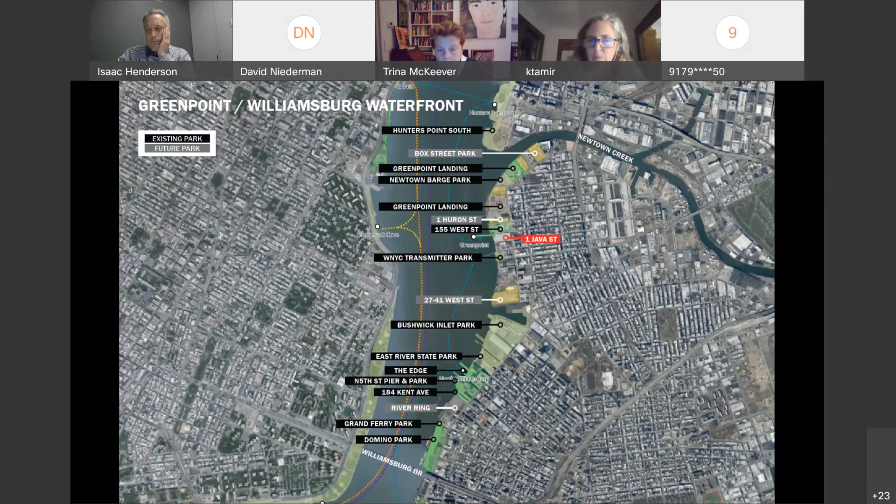Some of you have seen this slide before. We think it's really important to show ourselves in the context of the Greenpoint, Williamsburg waterfront. The greater waterfront is slowly being developed, and the waterfront parks are becoming continuous. For us, the first important thing is to be continuous with the community and the neighborhood, but also to the north of us, to the south of us, and of course the ferry to the water. The site sits between India Street, Java Street, West Street, and the water. We have India Street Pier as part of the project, as well as an upland area of about 11,520 square feet.

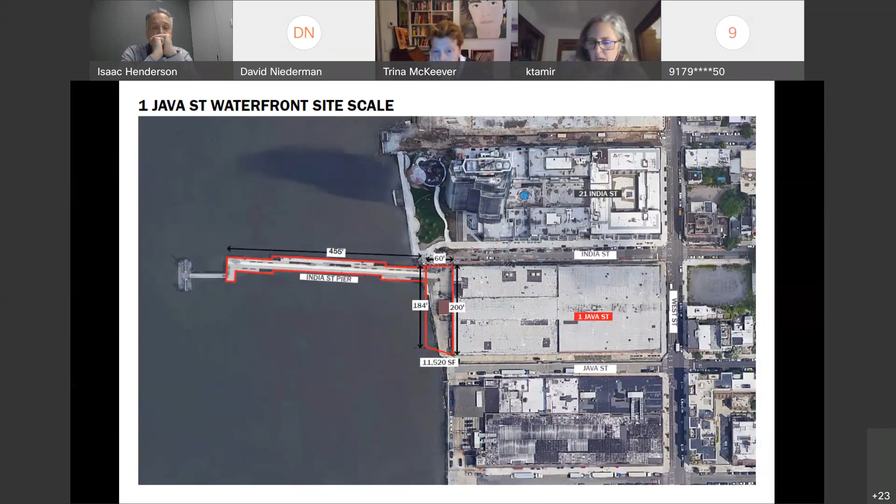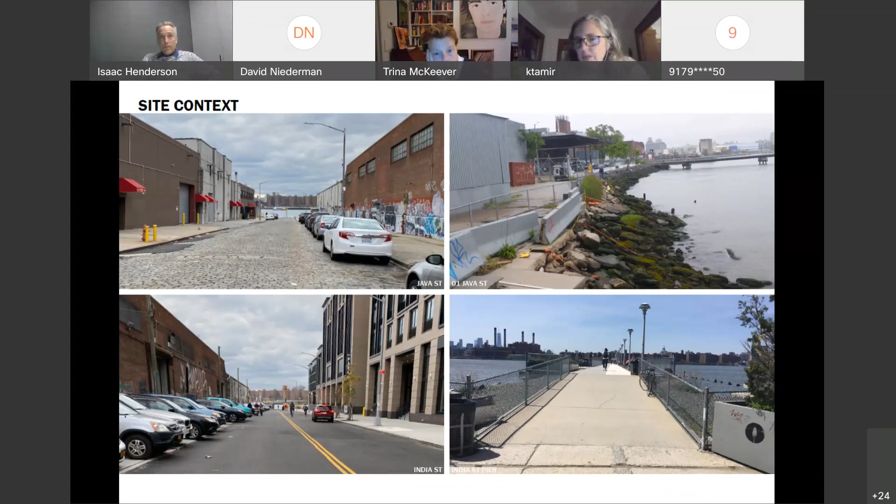The site context, you might know it. On the left side, we have Java Street, a cobblestone street that dead-ends into the water. Our neighbor to the south is a low-lying building, not changing at the moment. Below that is India Street, with the new neighbor 21 India to the right and the site to the left. On the upper right is the waterfront as it is today, in need of cleanup and refurbishing, and below that is the pier, the access to India Street Pier today.

Some of the site's constraints: the site condition is windy and salty, the water's edge is broken and needs repair, and the existing street elevations are quite low. The scale of the site, the WPA area, is also a constraint. The East River has strong currents, choppy water, and ferry wakes, so how far we can build into the water was something we looked at early on. The flood elevation and projected sea level rise are always a constraint at the waterfront edge, and of course city planning zoning requirements are another.

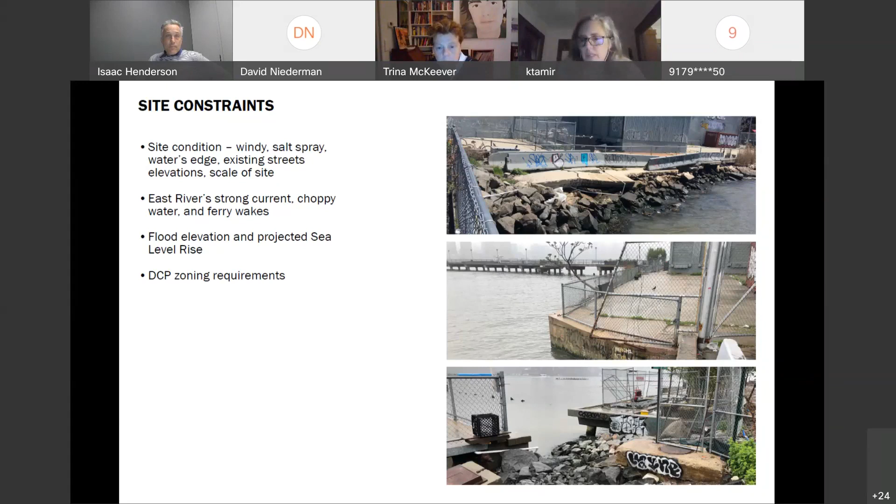The waterfront public access area is shown in green here, and it includes the pier, as I've mentioned. In addition, Lend-Lease is providing the area in yellow, which is almost double that upland area.

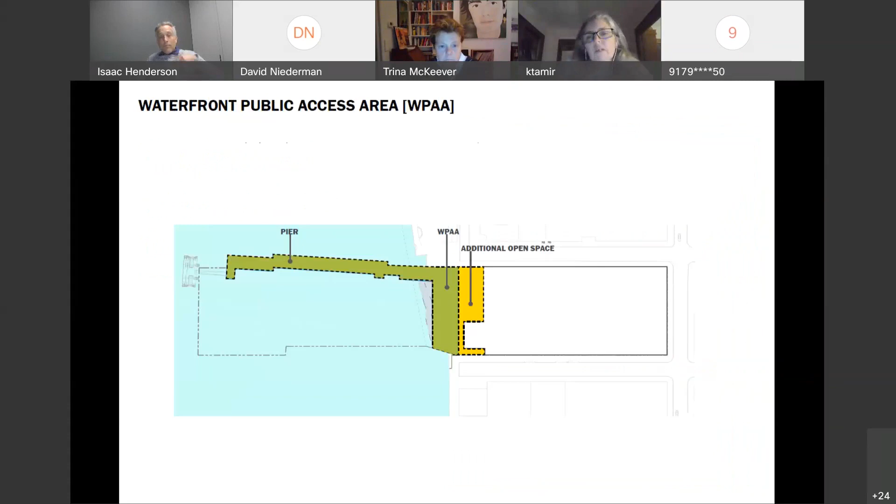The design is inspired by Greenpoint shipbuilding, the history of shipbuilding. The slip to us connotes a kind of freedom—for people, for boats, just to watch the coming and going. There's something really freeing about that. So in the design, you see these diagonal lines; they're not only pathways, they're a nod to that history, to the slips and what they could do.

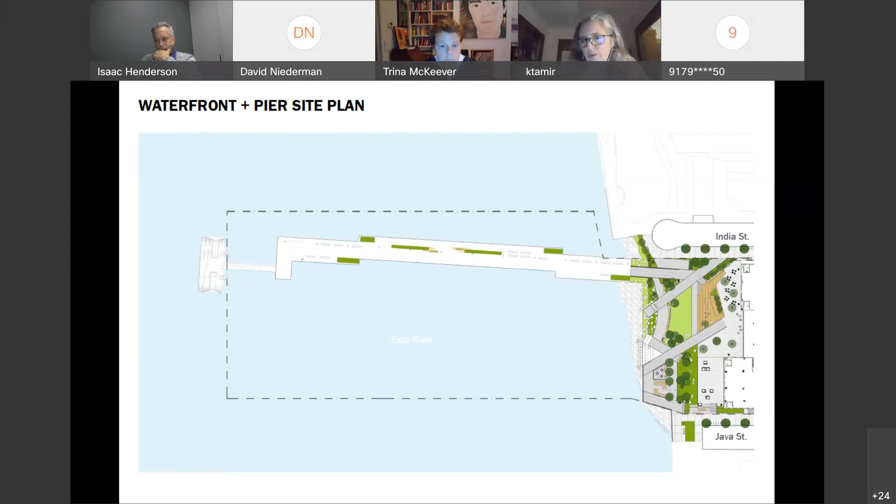This site plan shows the pier, but we'll focus really on the upland—we're not doing a lot on the pier. The waterfront site plan shows the area bounded in orange, which is the WPA area. We have the India Street Pier. I'm going to go from left bottom to right, sort of counterclockwise.

We have a number of gardens—upland gardens, riparian gardens—that also incorporate a sort of living shoreline, if you will. We have the river landing, one of the terminuses of the slips; this angle here is sort of immersed in planting.

The next one down, one walks down—there's of course benches, more gardens. The next slip down is what we call the prow, another sitting-steps area coming down that hugs the get-down to the south of it. The get-down is a series of steps that get to the water.

South of that is a platform area—we have what we call the pier reveal, a cutout in the platform fitted with tidal pools and a counter-height table with sitting stools around it. To the south of it, we have a social alcove with double-sided benches that offer engagement and gathering.

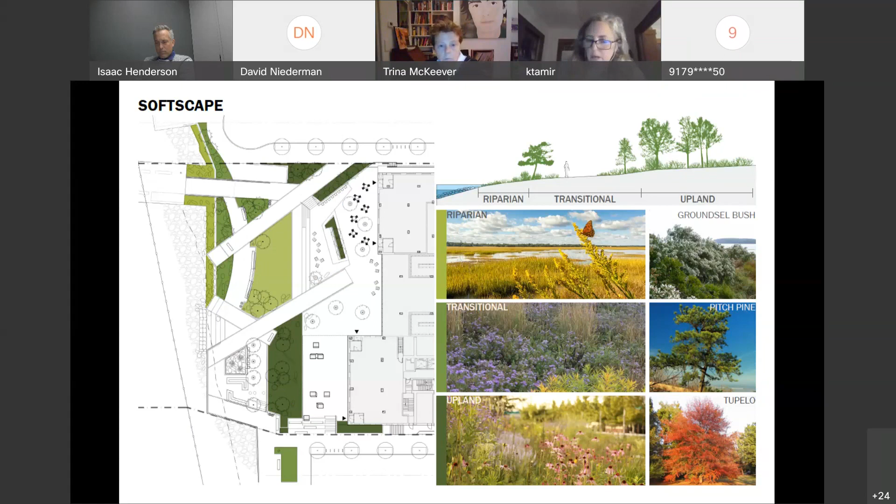A little more about the planting: at the water's edge we have Spartina patens that can take salt water, along with solidago, bearberries, and similar species. They'll be planted within the riprap at the very edge, along the bulkhead, which sits waterward of that. The next layer, the transitional planting, will include aster.

For tree species, we'll have Pinus rigida, the pitch pine, as well as the shorter pine used in Domino and Grand Ferry Park, and sweet gum, along with grasses and shrubs like baccharis that lend a kind of wildness to the planting beds.

A little bit upland, we will have ornamental trees: amelanchier, Nyssa, and Betula. On the prow we'll also have one specimen magnolia tree, along with various shade-loving and sun-loving plantings depending on location, for seasonal interest.

Connection to the river: again, the pier—we want to encourage people to come and fish and use the pier as much as possible. The river landing is a recessed landing within the planting in the riparian garden, so it really feels as if you're closer to the water.

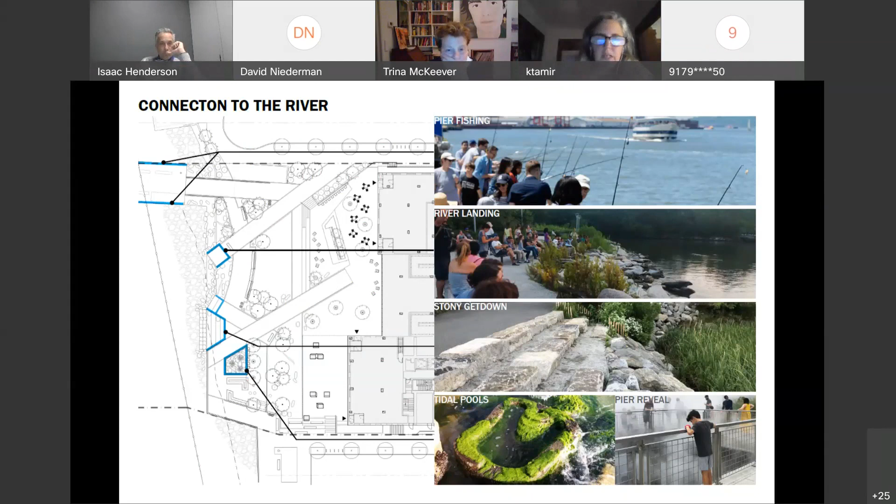The same with the stony get-down, a more natural-looking get-down. And then we have the pier reveal with the tidal pools at the bottom, where one could see the life of a tidal pool over the course of a day, a week, a season, a year, which would be interesting.

Some sustainability aspects incorporated here relate to stormwater management and natural resources. We've added 6,500 square feet of permeable surfaces using engineered soil for quick drainage, and incorporated a living shoreline technique at the water's edge. We're adding 36 trees, reducing the heat island effect through both soft surfaces and trees, sequestering carbon and providing shade. All of this also increases habitat area with native plants, attracting pollinators, and the tidal pools will be another element of that.

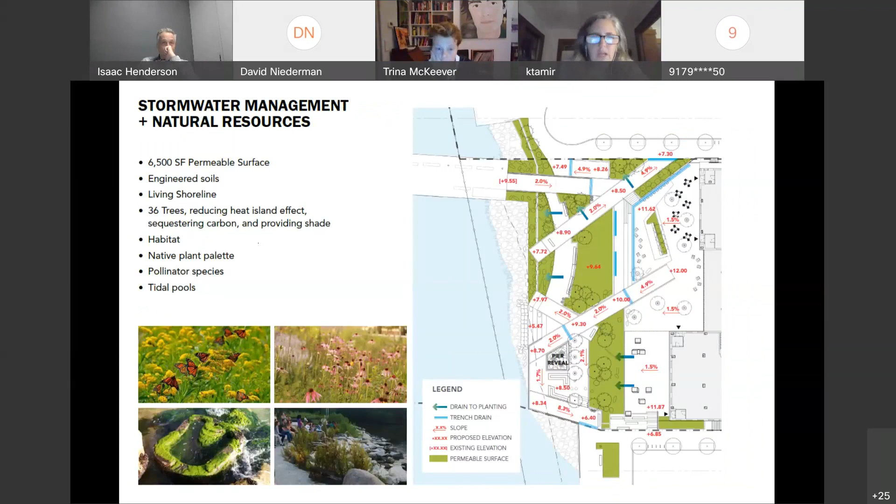So walking around the site, this is the approach from India Street. Coming up to our left would be the perch, the area that takes you upward to that kind of wooden deck. To the right would be the pier, and to the front is the water.

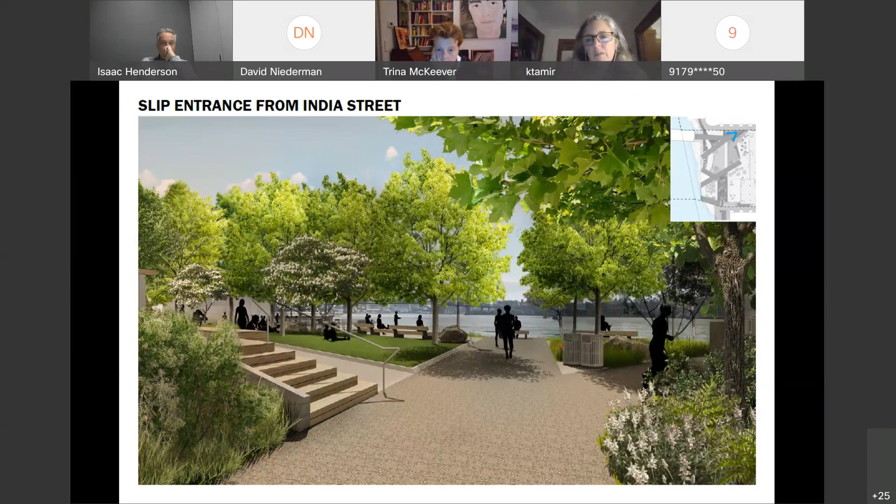If you look to the right, you see the approach to the pier. The ramp that leads one to the pier will be newly created, with a curb and railing, in the same fashion as the rest of the waterfront.

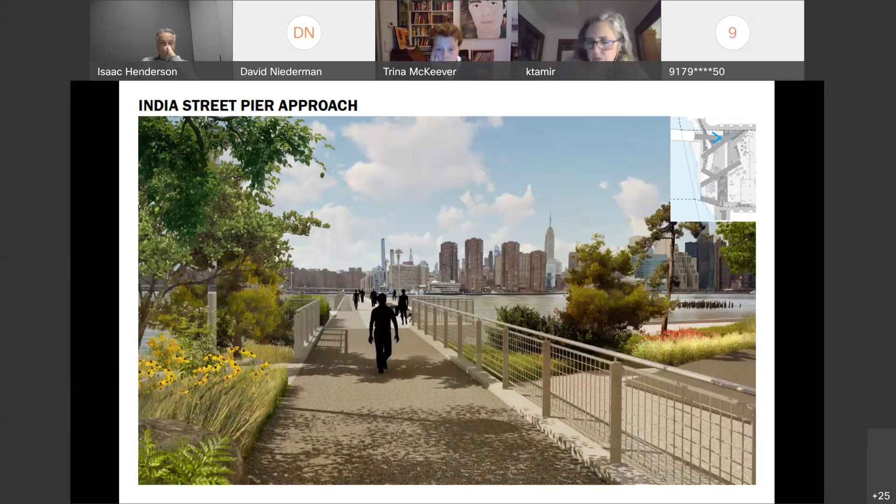Here we were able to remove some of the guardrails we had previously. I don't know if you remember, but it really made it feel more natural, and really a stony kind of get down to the water.

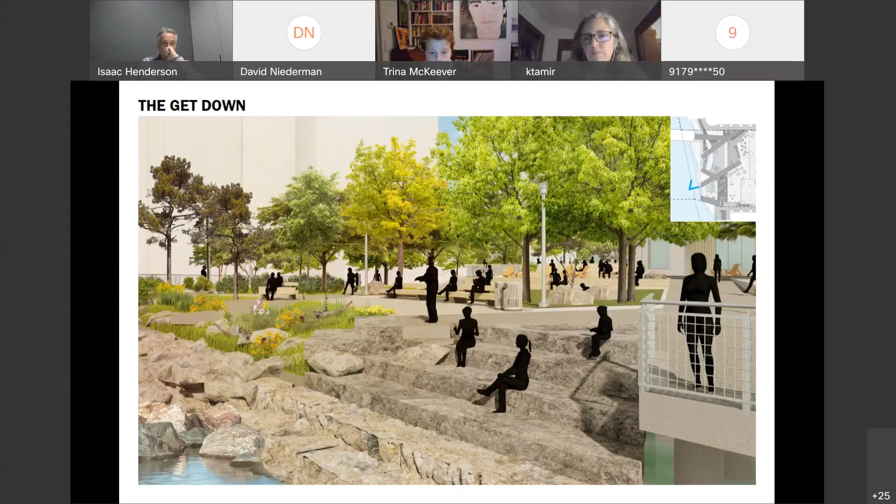Going back on the perch, just to show a few images of that as well, is the kind of other countertop that overlooks the pier. So again, if you're waiting for the ferry or you're waiting for a friend, it's a really comfortable place to sit. There is this kind of big planter in the middle that would also be a lounge seating on one side, a bench on this side, and a series of movable seatings as well.

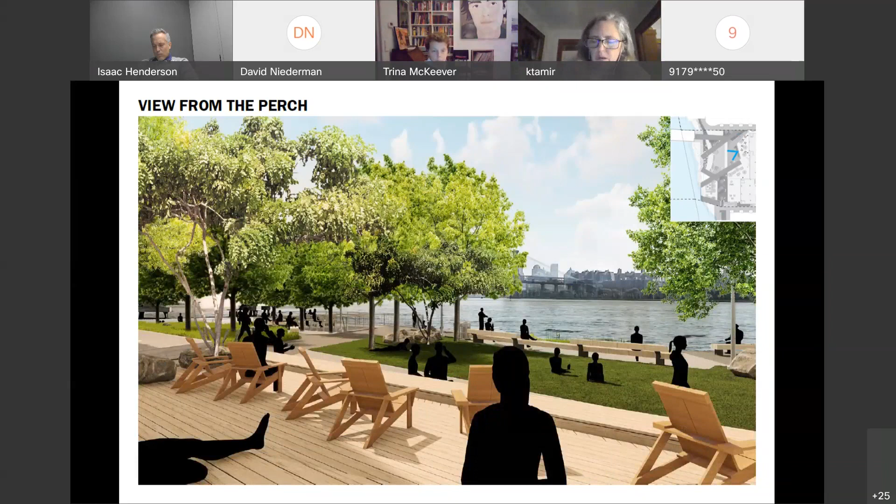A little bit about furnishing and materials. I know we had a few questions about it back in June. So just wanted to point out, we have bike racks, we have trash receptacles, we have a series of benches with backs, without backs. The areas that have little X's are companion seating - those for strollers, for ADA, for wheelchairs.

We have as well that pier reveal countertop, then also a wood bar on top of the guardrail surrounding the pier reveal only. The railing underneath is stainless steel, and the railing around the platform is all stainless steel per the WAP. But here at the pier reveal, we are changing the top rail to wood.

Light poles, we're using the Flushing Meadow pole throughout the site. And at the end here, where you see in teal color, we may have to use DOT standard bench. We will see if we could use the same language. DOT had requested their bench.

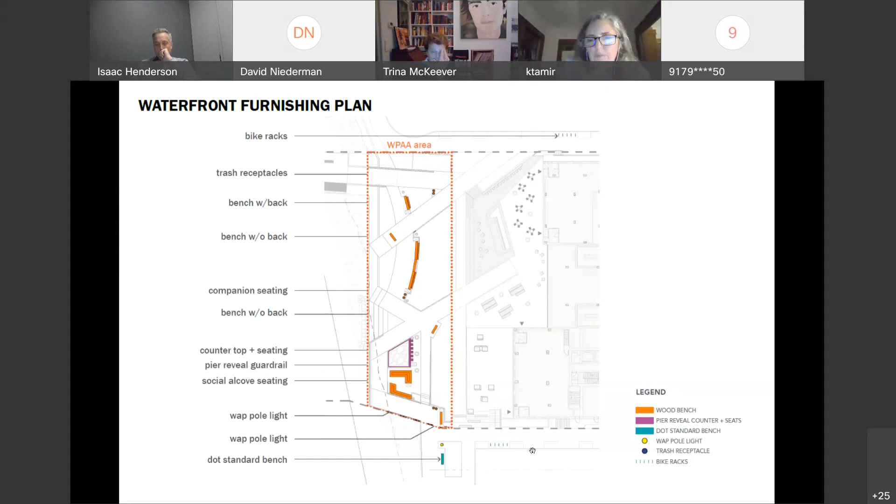The palette of seating within the WPAA is such, it's made of wood. Exact species is yet to be determined, we're looking at various sustainable approaches. So there are long benches with backs, without backs, short benches with backs, without backs, double-sided bench, and seating that is embedded in the seating steps.

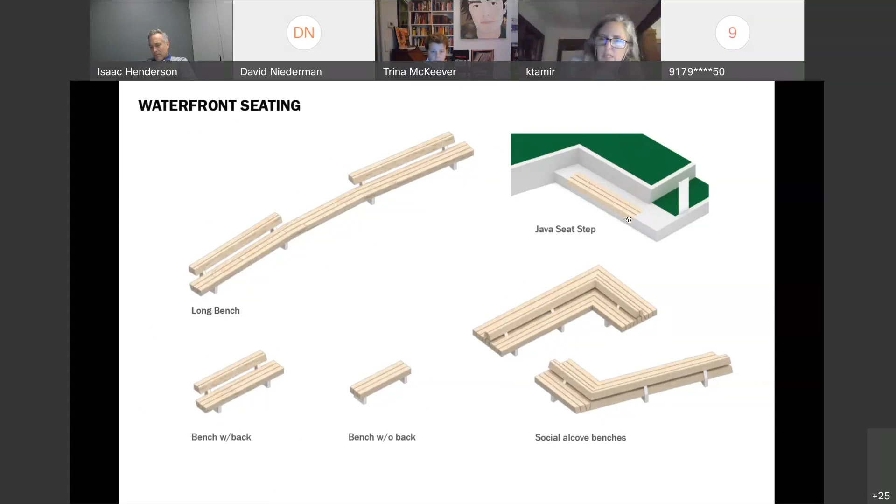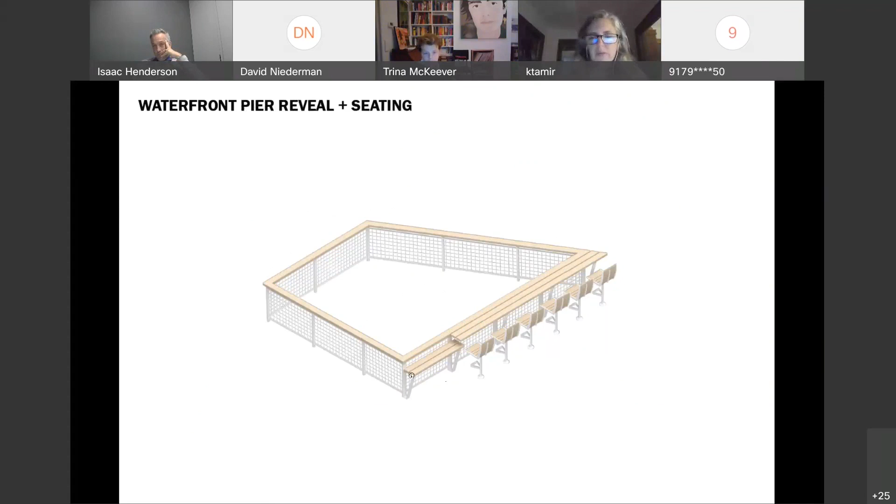And the pier reveal looks something like this. Again, there's a kind of countertop with a wood bar top around, so comfortable and warm when somebody leans against it to look down to the tidal pools, as well as a kind of an area for ADA users.

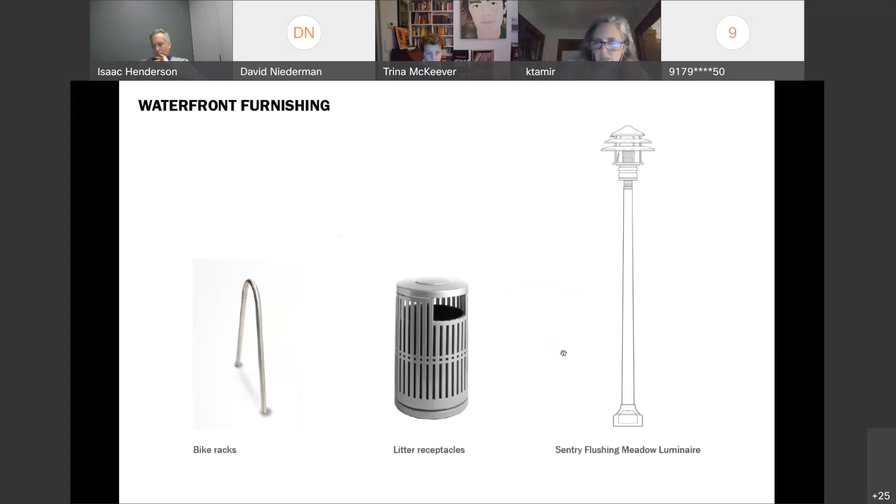Other furnishing would be the bike rack, the litter receptacles, and the Flushing Meadow luminaire. A bit about paving - this is the context of materials surrounding our site. We have the asphalt paver along 21 India waterfront, a composite decking in a small portion, a precast concrete hex paver in the secondary path in the back there, 21 India again. And then jumping to Java, there is the old cobblestone.

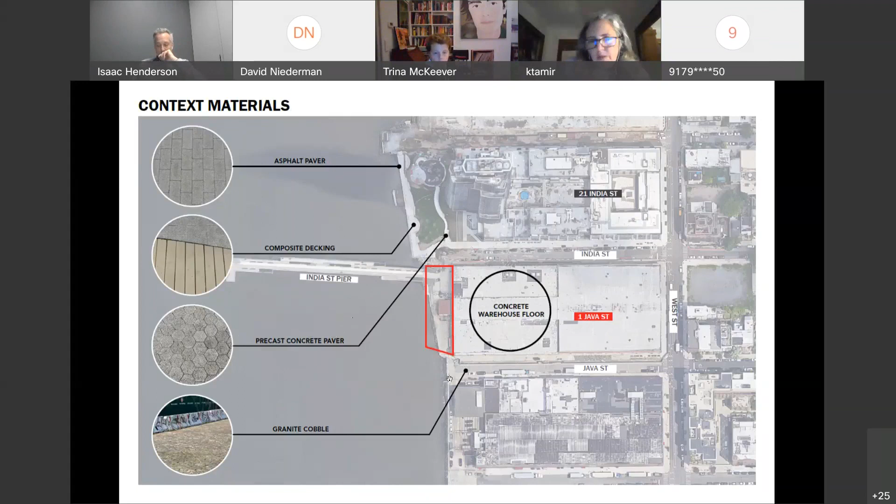The waivers that are requested are two. We actually eliminated a few since we've last spoken. So the first one would be the screening buffer.

It's required that we have 50% evergreen species and that they should be at least 4 feet high. The area where we're asking for the waiver is this planter, this larger planting bed. That's because we want people to be able to see the views to the water, we don't want to obstruct the views. So the ratio of evergreen and the 4 feet is to create transparency, to be able to see in and out, from and to the river room, which is this area here.

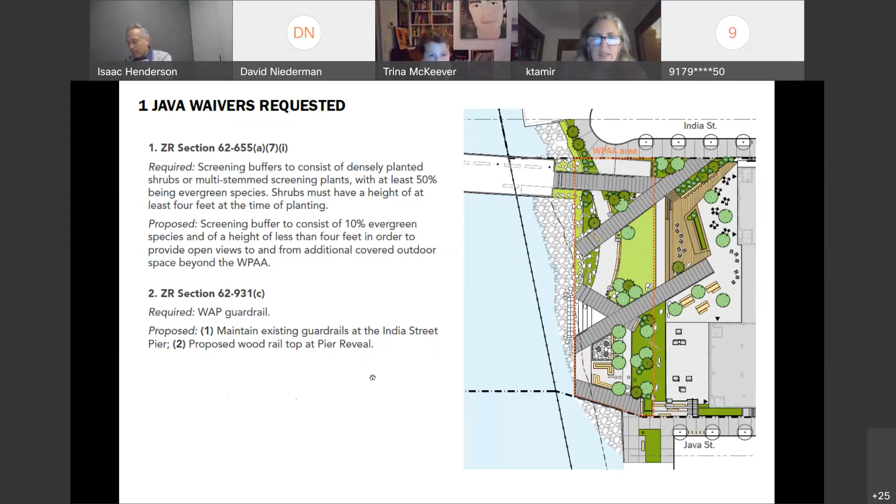And Isaac, I'm going to hand it to you here for the community benefits.

Thanks, Karen. Just to talk about the overall project — we're viewing this as having a lot of community benefits here. Running through them: obviously the real focus is improving what is an underutilized, vacant, abandoned space that will really enliven and give new access to the waterfront. In addition, we're also going beyond what we're required to in the WPAA area and adding additional open space beyond what zoning requires.

And although the building is as-of-right, it will be 30% affordable, so we'll be adding a significant amount of affordable housing to the overall housing stock, as well as activating the ground floor plane, both facing the waterfront and along West Street, enhancing the ability to make this a walkable, community-driven neighborhood.

We're also currently engaging with a number of community groups who would be provided with opportunities around educational programs on the waterfront itself.

And then, aside from the project itself, there are going to be significant workforce benefits. We're really focused not only on employing minority- and women-owned businesses, but really focusing on local persons who are unemployed or underemployed and looking to enter the construction field for the first time.

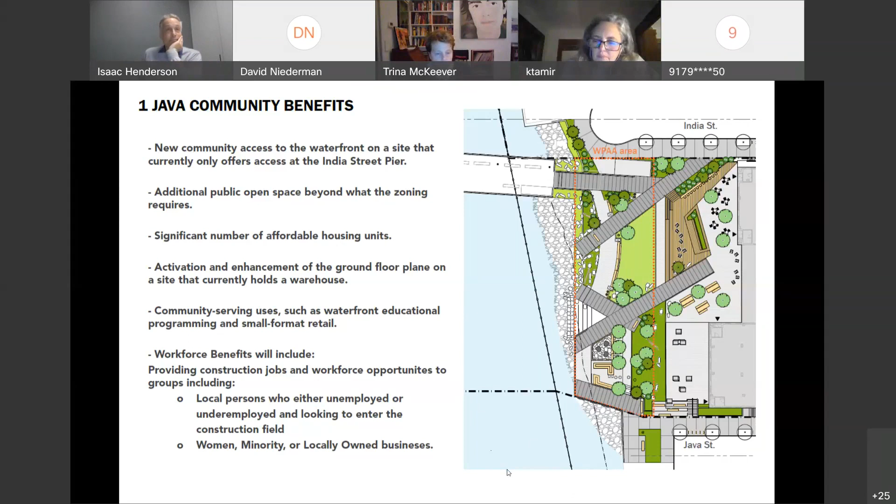That's it, everyone. I'm going to toggle back to the site plan, but by all means, if there's anything anybody wants to discuss or a particular slide to go to, I can go there. So, opening up to questions or comments, if anybody has any.

Del, I have a question — anyone have a question? I do, Del. Yes, thank you. Yeah, thanks for the presentation, Karen and Isaac and everyone. I've attended community meetings where I got a sneak preview of some of this, and overall I really enjoy the design.

It's one of the more interesting private-public waterfront developments for open space, especially near the waterfront, with the varied interactivity and access. I love the plantings and the tidal pools and the get-downs and the steps — really good.

I just had one other question related to the first waiver or modification, the reduction of evergreen species in that spot beneath the trees. Is it going to be lawn, or is it going to be plantings?

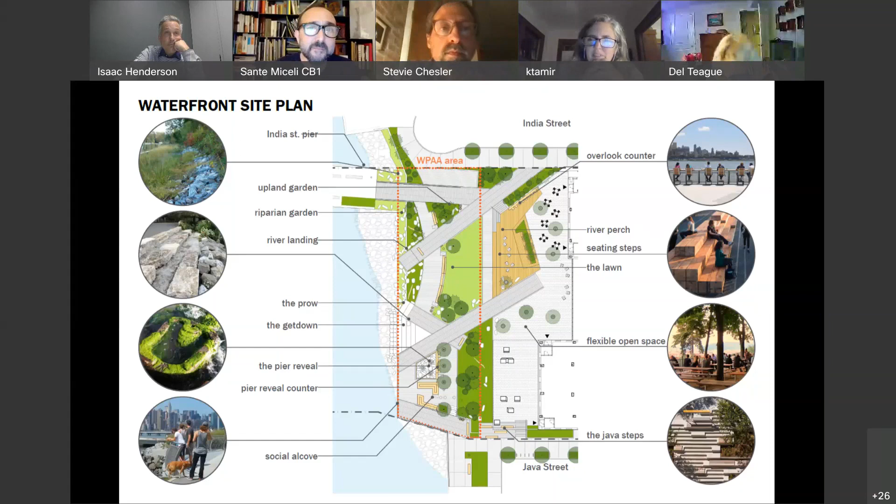Del, can I make a couple comments? Anybody else? Can I? Can you hear me? Why don't you go ahead? Oh okay, I just want to make sure - sorry, I was muted. Michele, and then Katie is next.

Thank you for the presentation. A few things I'm actually concerned about. I know it's not a very big space, and looking at your page right now there's a lot of icons with a lot of elements - I know where they are, many of these belong somewhere else. We're trying to bring all this idea in, but it's a very small space.

The only thing I have concern about - I've personally been talking for years about naturalizing the waterfronts, and definitely some of these ideas are here, but I see that it's kind of very boxed. There's all these compartments, you'll be using the word rooms, and I feel this idea of rooms, all these many compartments, doesn't naturalize at all. We have concrete, we have other material, and we have the deck. I don't feel extremely comfortable with that idea.

I wish there was some design that could be more flowing, more natural, emphasizing green spaces, emphasizing grass or other elements - this is one of the first graphic things that just appears on the plan.

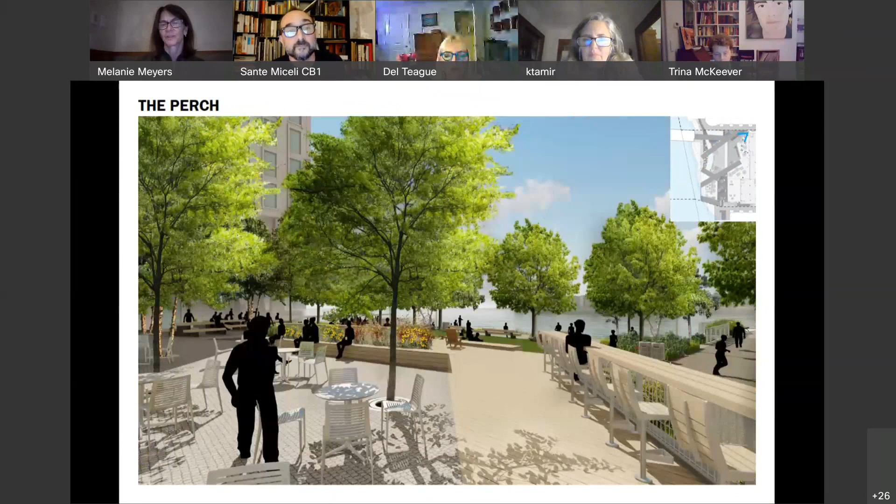So we have a big area comparatively to the scale of the site, right? A big area here and another big area here of more wilder planting. There is the lawn here. And we are obliged to provide a certain amount of pathways and benches as part of the zoning. There is a softly inclined pathway connecting us to the north, and a ramp in the south.

And the get down, we softened to the extent we could with stone - similarly to what you're saying, thinking of riprap that would allow people to stone hop, if you will. So you see, it is the site. We tried to put as much as we could into it that would both satisfy the zoning requirements and satisfy wanting to see more wilder, ecological based design, while also providing the lawn that's required and all these other amenities.

And I think we did make amendments to the get down to make it more accessible to the water - there's definitely some feedback there. Obviously the currents are strong, so we're balancing that with safety. There was also a desire from a lot of feedback from other groups to have active spaces that could be programmed a little easier. So we're striking a balance between the two. I hear your comments, but there's a lot of different people coming in different directions, and we tried to address a lot of them. There is a lot of great open space that will be an opportunity for people to sit, reflect, and take in the greenery.

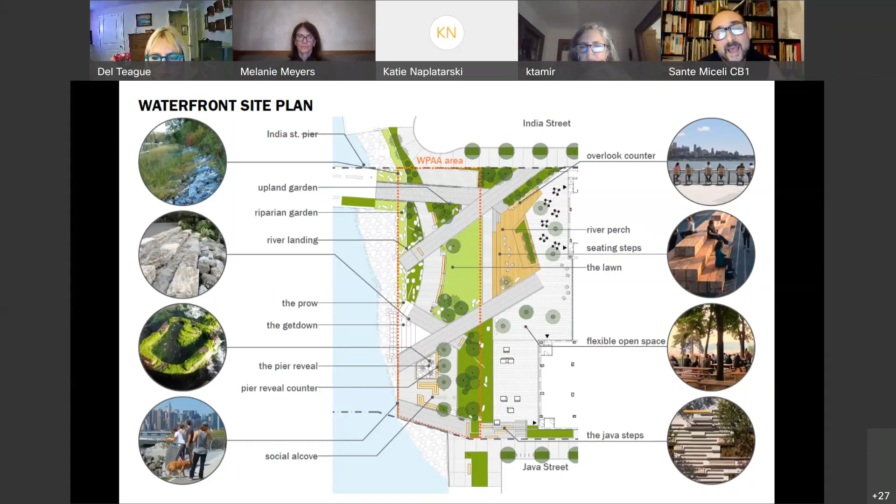Are you objecting to the wood? Are you objecting to the variance so they can have the wood on top of the rails? Actually, the wood is always welcome, as the bench made of wood, that's a very nice element. I don't know, we will have to look in detail. The concept is kind of vague to see how harmoniously they could be combined.

But definitely, the general fence on the pier, I will stick to what is in the master plan. If there is an additional element, that the pier rail could be integrated with the wood in that design, I won't be against it, especially if it's kind of linking to the design of the bench. That could probably be a harmonious integration addition. The pier, I will probably stick to the same, to have the continuity of the waterfront to the rail that is in our master plan.

Yeah, and I'm definitely against all this boxing, this compartmentalization, these separate rooms in our park. I wish it to be something more fluent. I repeat for the last time, they could naturalize and people could transition from one area to another.

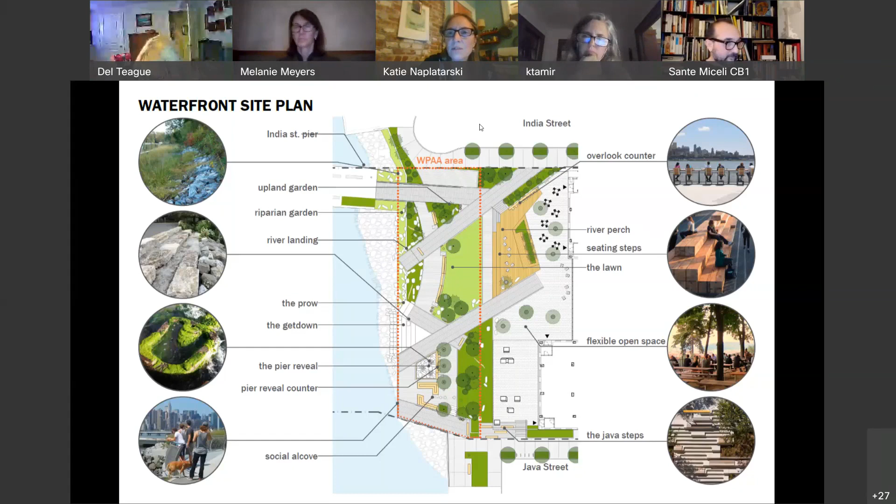In terms of the asphalt paver, I know there are different types. I've seen different ones - Transmitter Park has a really nice one. It seems to get burnished in a nice way rather than looking like asphalt. So there are different choices. I'd get the one that can look a little burnished, it looks nice after it gets worn a bit.

I say that the waivers are all okay. I like the railing, the wood railing on top of the get-down. The waiver for the ferry landing, I do not think we should approve of that as a board. It is now chain link fence, I believe. I don't think there is any other ferry landing anywhere in New York City that has a chain link fence, and it does not look good. I don't think we should approve that waiver.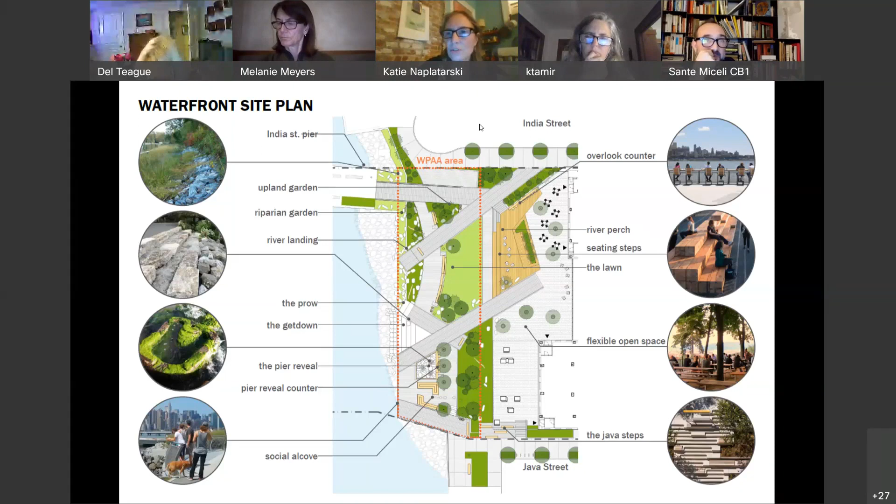I agree with the waiver for the plantings, absolutely, and I actually applaud you for doing that. It looks like there's shade trees, and I think that's fantastic.

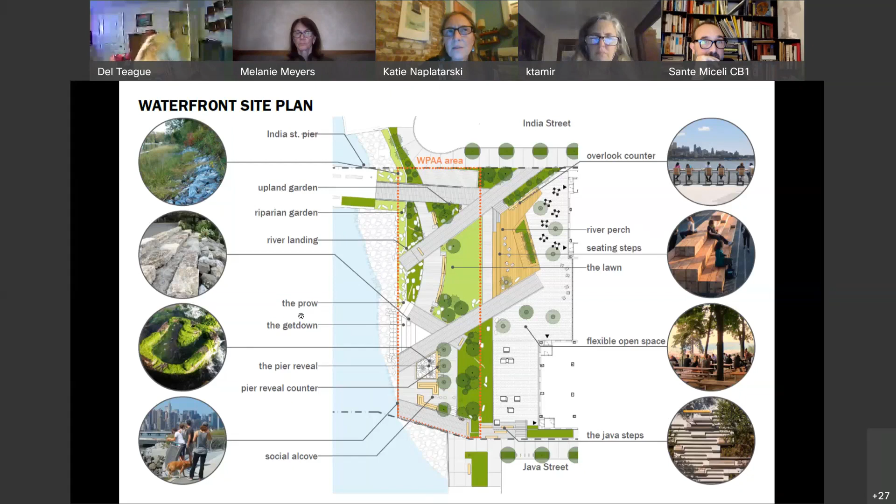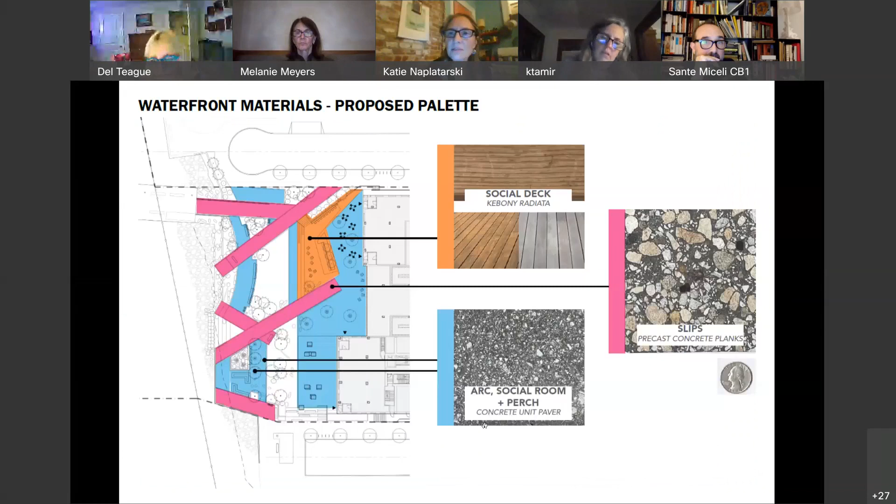In terms of the walkways, I'd like to just see the concrete again, but also to make a suggestion that perhaps some of those walkways could be wood, except for the main path by the shoreline, which I don't think can be wood. But I know that on the master plan, wood is allowed as one of the materials. It could soften it up a little bit - it could soften it up a lot. So I'd really recommend some of the walkways or the slips being wood.

And okay, we love wood, but it's a little bit low. It would require a lot of maintenance if it's... say it again.

We love wood, but the park is a little low. In case of flooding or whatnot, it would be a lot of maintenance too. And even with no flooding, the wood requires a lot of maintenance. So we kept it to pretty minimal, up where it's a little bit higher.

I think there are other parts on the waterfront around, not on our waterfront yet, that use wood, so they might be higher in elevation. I don't know, maybe somehow you could find a way to put that in there because it would soften things a little bit. But that's all, okay, that's the concrete planks, the precast concrete planks, that's what those walkways would be.

Interesting. Yeah, the idea is that they feel like a plank of, in some ways, wood, but it's not going to be wood because of that.

Can I make another suggestion? I don't know how the other people on the committee would feel, but what about something that kind of mimics bluestone? In Hunters Point South, the narrower walkways are beautiful concrete. That would fit in with the WAP because you have to have a certain amount of gray. It's a beautiful color concrete, and the lines, instead of being all uniform, are sort of out of line, like if it goes like this, the lines go like this. It's really kind of nice.

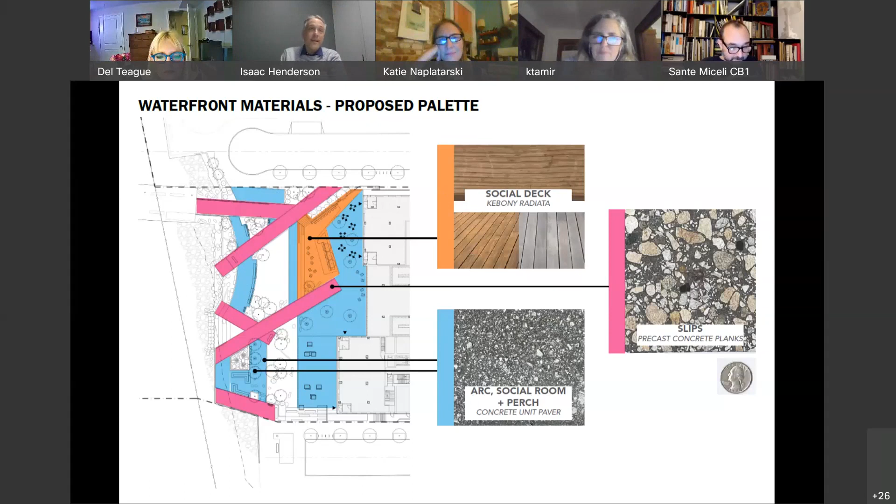We view ourselves as long-term partners in the community. It's just very expensive to remove that fence at this time. We have a lot of improvements to the pier that we have to do structurally first. That's where we're coming from on that. So it's really a cost thing at this point, but we are long-term players in this community, and that pier is a significant portion, so it's maybe something we'll take up at a later date. But right now we're just really focused on getting this online and getting the pier structurally sound. That's really the reason behind it.

I think that if we are to agree to that waiver, Del and the rest of the committee, I think there must be some kind of restrictive declaration that puts a time frame on it, so it gets done in 1 year or 2 years. We want it done while they're working on the pier, while the pier is closed. This is the opportunity to do it. You're right, Trina.

Is the railing around the pier reveal? Is that what's supposed to be on the pier itself rather than the cyclone fencing? It's this one at the edge of the platform. Is that what the master plan calls for, that type of railing? Yeah, that's what's in the zoning.

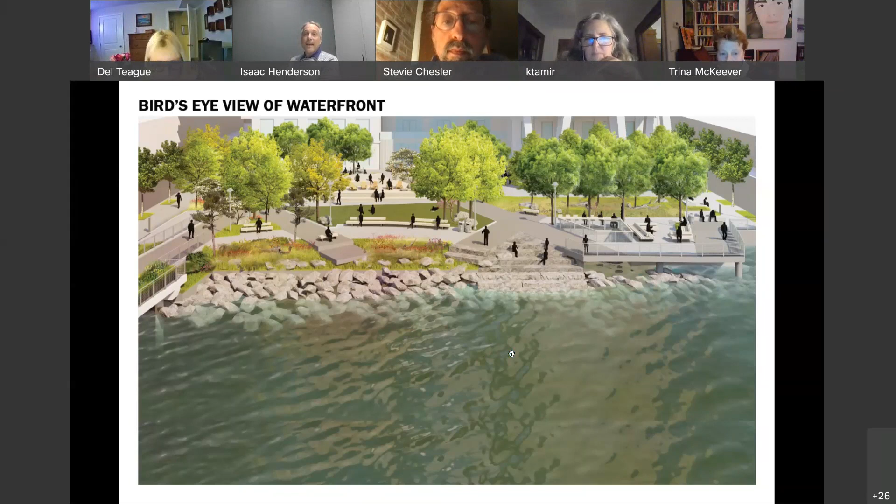I'm also wondering about the possibility of making the design a bit more flowing and less boxy. I mean, I think we've got a lot of different inputs from people on the desire to have a multi-use area. I think it flows pretty well, and there's a tremendous amount of open space. I respect some of these comments, but I don't feel that this is a boxy design. I think it has a tremendous amount of places for sitting and opportunities, and a lot of places for reflection, open space. So I don't agree that it feels boxy in my opinion, but people are allowed to have their different opinions.

Del, can I ask - I tend to agree with that. I like the varied spaces, a lot of them, varied in the content of physical structures and plantings and so forth.

Does anyone else have any other questions or comments before we end this and go to the committee meeting? I do, Del. Okay. And Del, there is one person who wanted to speak. Okay, thank you, Marie. So Cory?

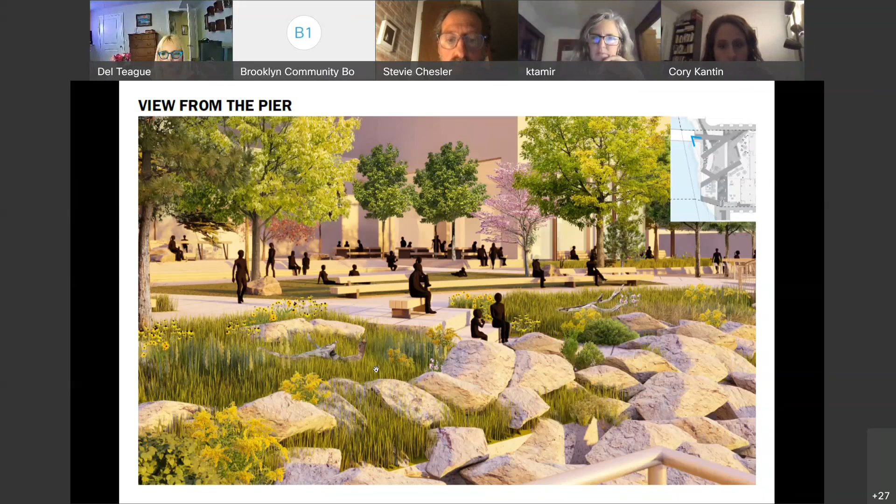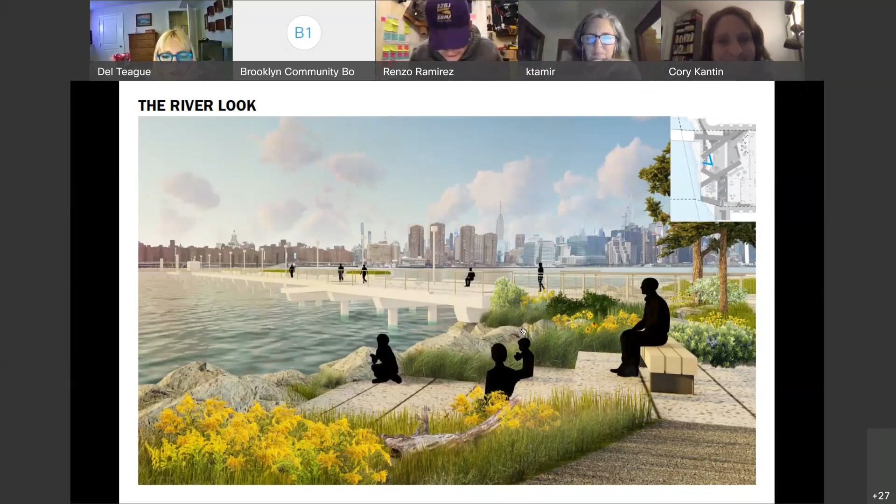Hello, can you guys hear me? It's Renzo? Yes, okay Renzo. I'm sorry, I don't know why it wasn't working. I don't know if you guys can see me. Can you guys see me? Hello everyone, could I be seen and heard? We can see you, and it's good to hear you. Okay, okay, good evening Community Board 1.

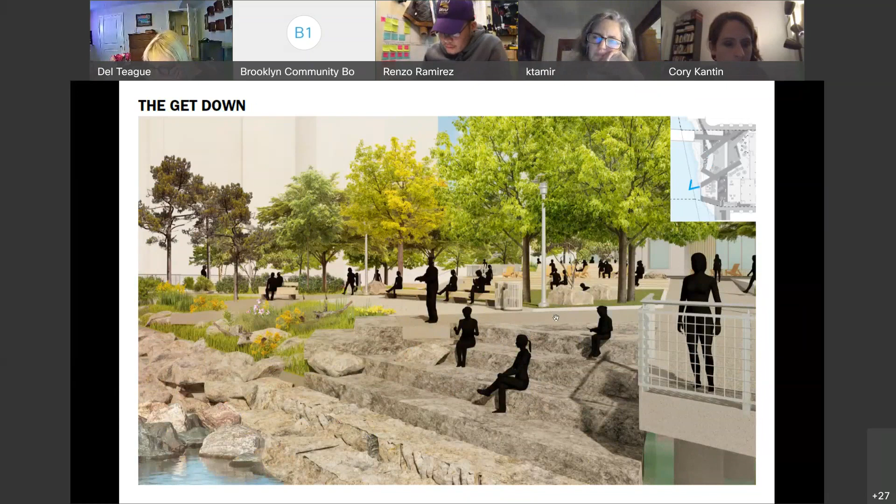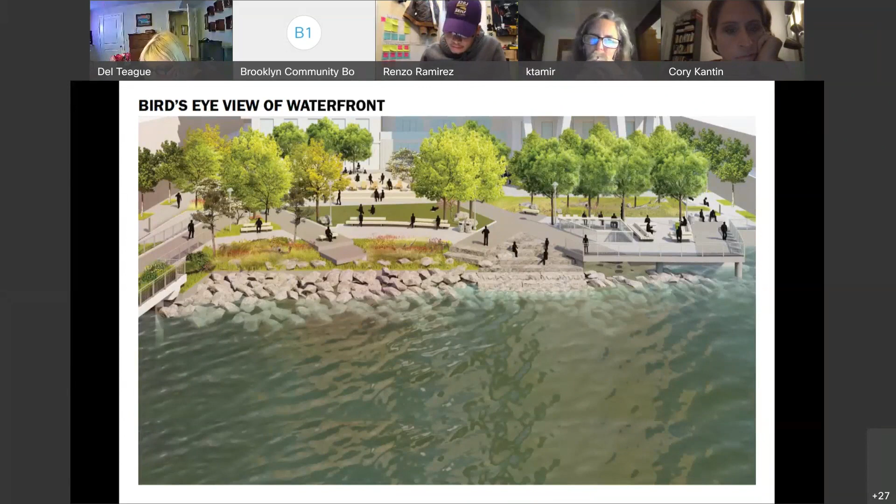My name is Renzo Ramirez, and I am a member of 32BJ SEIU. I'm here on behalf of my union to share our concerns regarding One Java Owner LLC's proposed development at 1 Java Street waterfront. We believe developers should commit to providing prevailing wage building service jobs in order to build a more equitable economy in New York City. Most building service jobs are filled by local members of the community who need and deserve family-sustaining wages and benefits. One Java Owner LLC has reached out about making a commitment to the prevailing wage for building service workers. We will continue to keep the community updated as we hold conversations with the developer. Thank you so much for your time, everyone.